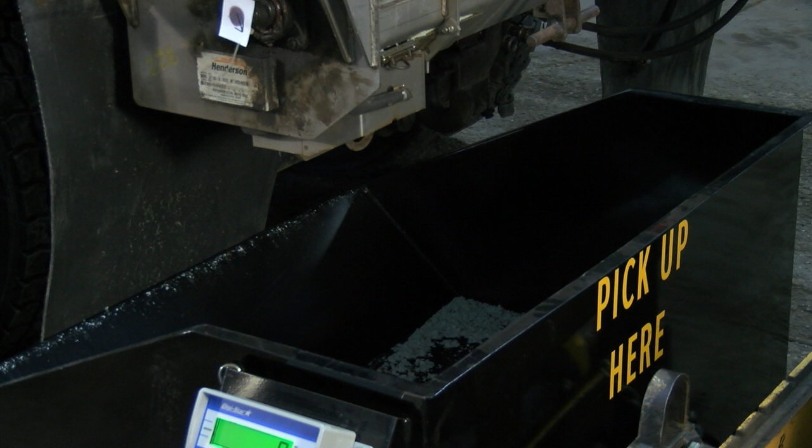Important items you're going to need to do this process thoroughly is a good scale. We went on a co-purchase with the City of Wixom, Michigan to purchase a scale, and it's really moved the process along a lot quicker and been very efficient for us. You don't have to have a big fancy scale to do this process. You can also just use a simple bucket with a human scale, set the bucket on a human scale, or you can hang this bucket from a fish scale or some type of hunting scale to do that.

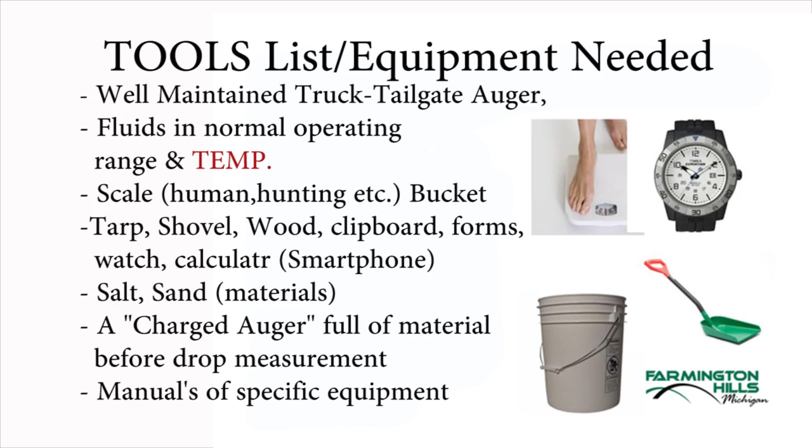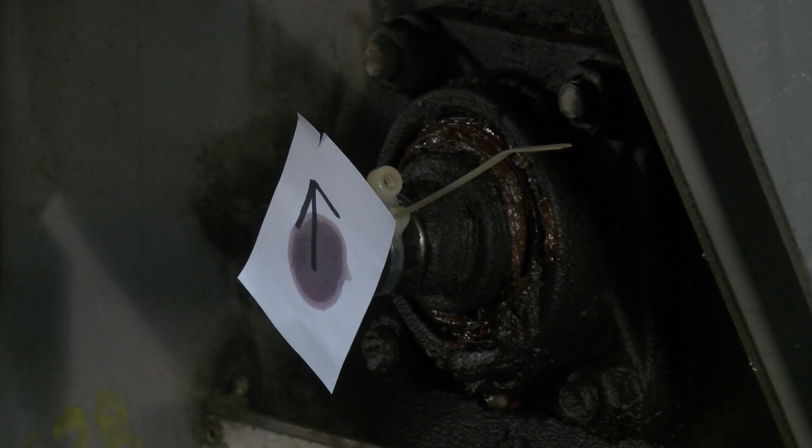It's also very important on the end of the auger shaft to either place a zip tie so you can count the revolutions once we start the process, or just a simple dab of grease on the back of a piece of white paper with an arrow on it so you can correctly count the revolutions that way.

The next important step in this process is have your coworker sit in the cab of the truck and have them make sure the truck is running between 1,500 and 2,000 RPM. That way they also have the stopwatch or device to time the 30-second or minute drop and count the revolutions of the auger. It's already in the truck with them, and you can stay in the back of the truck and count the revolutions.

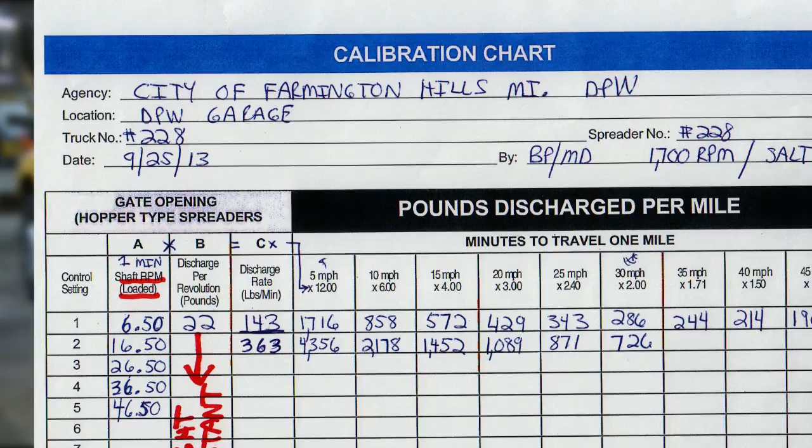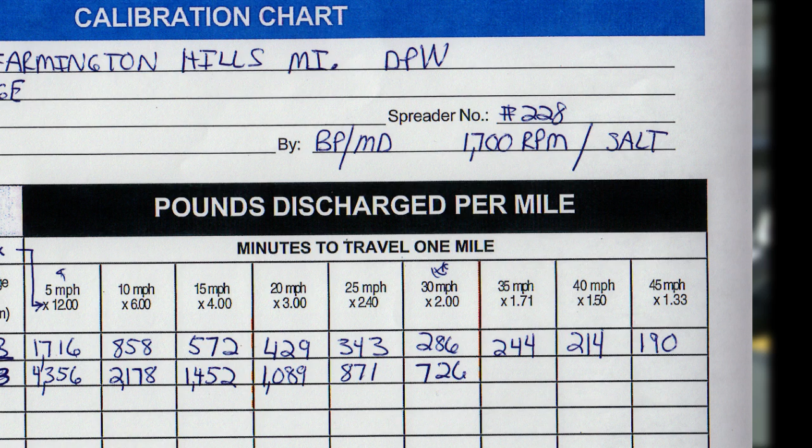Just a quick reminder, when you're calibrating each truck, make sure on each sheet that you write down the equipment number and the number of the auger in case you have a different auger or a couple different augers for the certain piece of equipment. Make sure your spinner circuit is on 0. We're only concerned about the auger circuit, so make sure your spinner circuit is on 0.

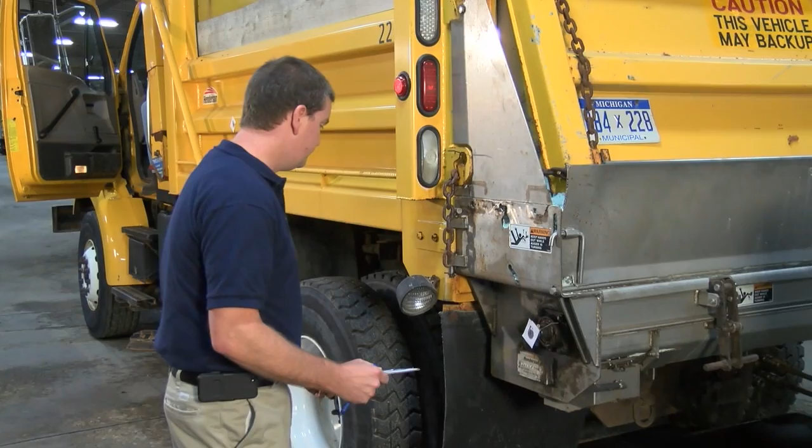Make sure the operator has the truck running, warm, and for this particular piece of equipment, we're going to run it at 1,700 RPM. Go ahead, Mike, start up the truck. When he says start, I'm going to count the revolutions until he says stop. Okay, Mike, I'm ready.

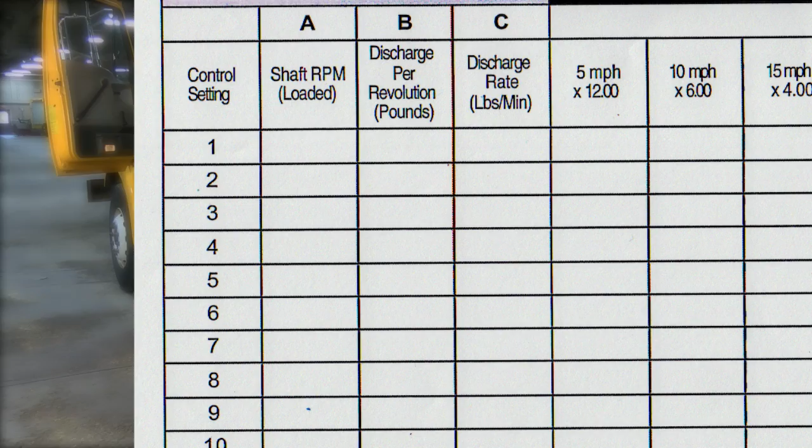We're going to go all the way up to auger 5 setting. This truck maxes out hydraulic capacity after 5, so even if we did all the way to 10 on the auger setting, the revolutions per minute after 5 would be the same. So we're going to go up to 5 for this next step. We're going to go 2, 3, 4, and 5.

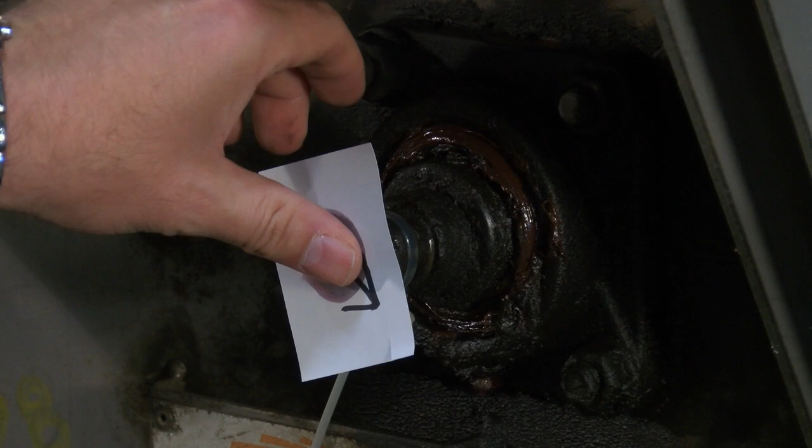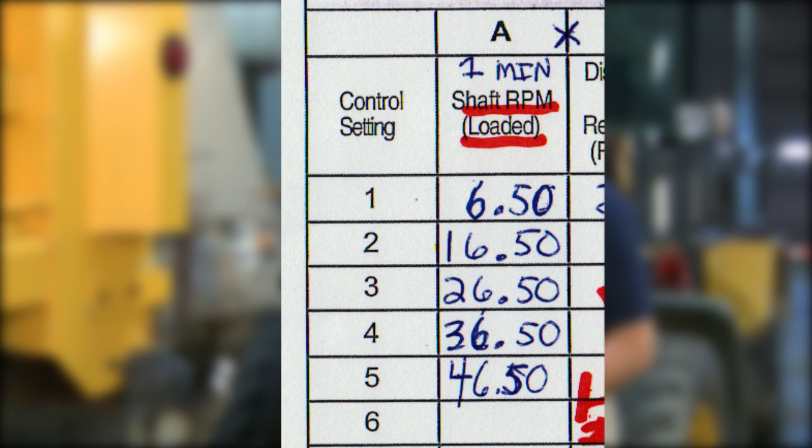So on this particular piece of equipment with a 9-inch auger at 1 minute, on auger setting 1 we got 6.5 revolutions, auger setting 2 we got 16.5, auger setting 3 we got 26.5. So you can see it goes up to a certain point, then once the hydraulics max out you should be getting the same number probably after 5, 6, 7 and so forth.

Okay, the next step in this process is called the drop test of the material. You want to make sure that the operator's got the truck running 1700 RPMs, fluids are warm. It doesn't really matter what setting the auger is, 1, 2, or 3. For our intents and purposes, we're going to do the drop test on 1 and count 1 revolution. Make sure your counter is zeroed out. I'm going to have Mike start the truck and I'm going to tell him to start and stop after 1 revolution.

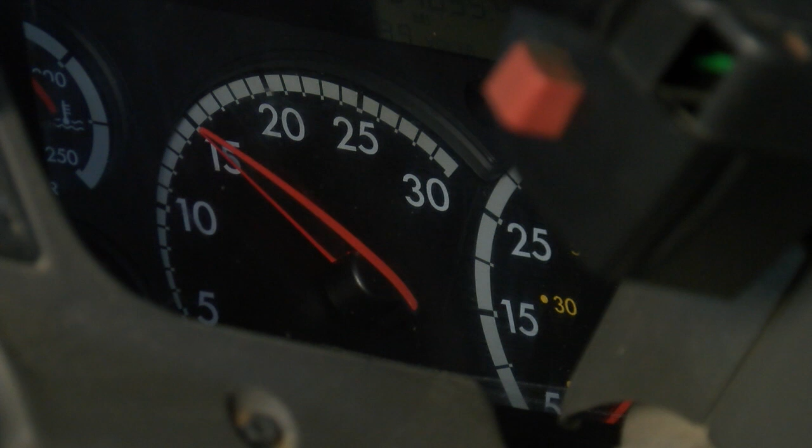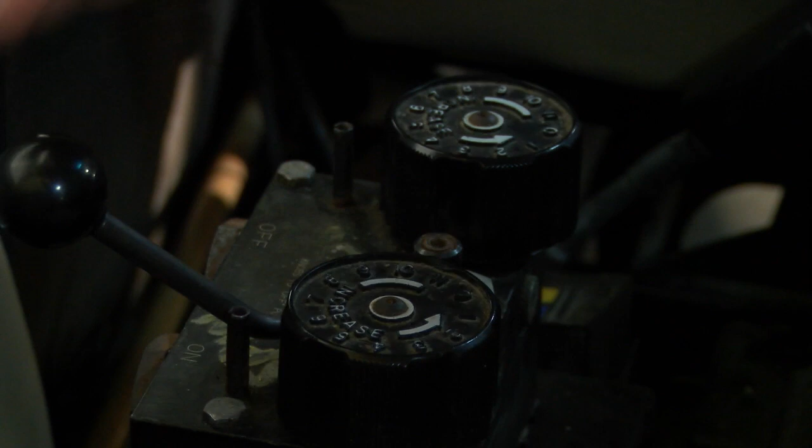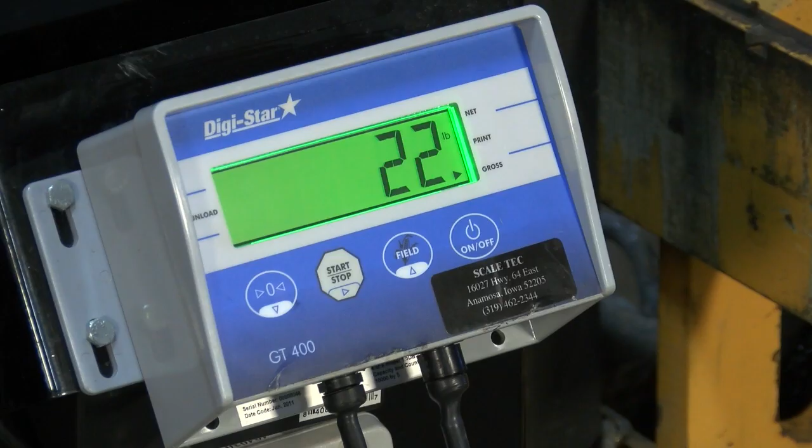Okay, Mike, go ahead. 1 revolution. Go. Stop. Okay, for 1 revolution of the auger, it was 22 pounds. You record that in column B on your chart, and that should be a constant number all the way down.

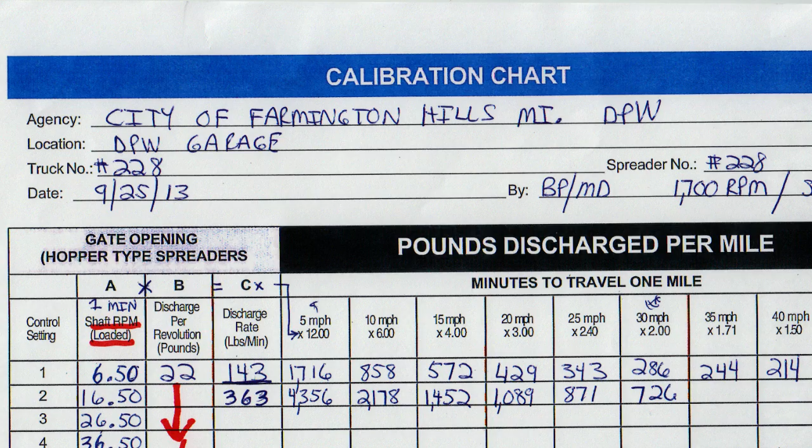Okay, we've got all the physical stuff done with the truck and the operation out in the garage. Now we're going to go over the calibration chart. I've already filled out the top portion of the chart. Like I mentioned earlier, you want to make sure you fill out a chart for each specific truck and auger. So I filled that out at the top. Now there's 3 columns, A, B, and C. A is the number of revolutions at 1 minute for each auger setting. So we did auger setting 1 through 5. I already wrote those down.

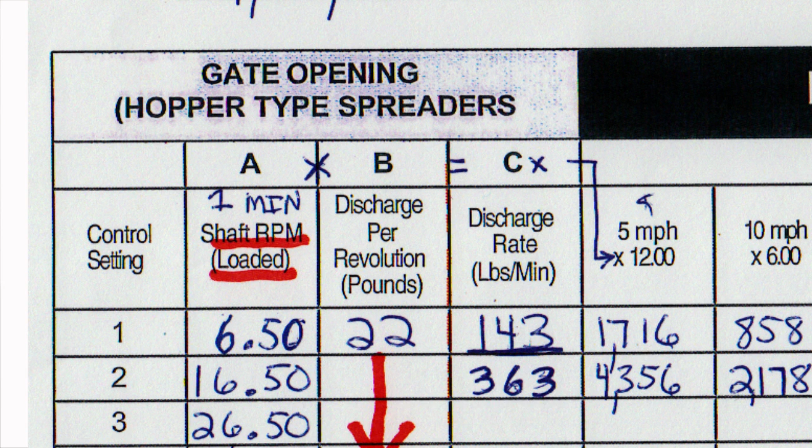Then we go to discharge per revolution in pounds. That was 1 revolution, that was 22 pounds. And that'll stay constant throughout this whole chart, whether it's setting 1 or setting 10. The next column is column C, and that's your discharge rate, pounds per minute. So basically you take column A times column B equals column C, correct? So for control setting 1, we had 6.5 revolutions in 1 minute. Times that times 22 for the discharge rate, and then equals column C, 143 pounds per minute.

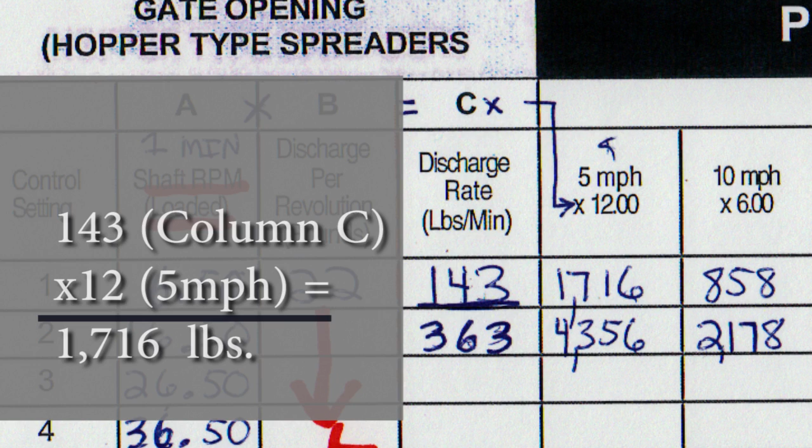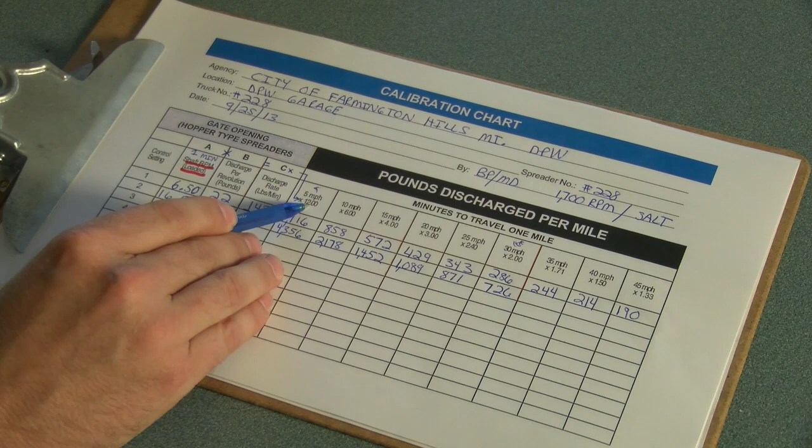Then we've got about 6 or 7 other columns, starts at 5 miles an hour, goes all the way to 45 miles an hour, and you have to take the discharge rate, pounds per minute, column C, and times that. For example, 5 miles an hour would be discharge rate, pounds per minute, times 12.00, and that'll give you your pounds per lane mile. So I'm going to have Mike double check some of my math. So column C's 143, discharge rate, pounds per minute, times 12.00 for 5 miles an hour, should be 1,716 pounds per lane mile. If you were in auger setting 1 at 5 miles an hour, that's how many pounds per lane mile you'd be putting down.

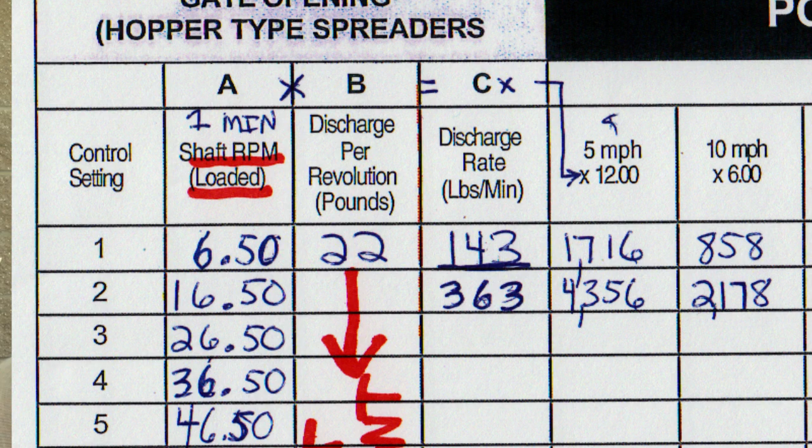And just for comparison, that was at 5 miles an hour for auger setting 1. If we took 143, discharge rate, pounds per minute, that's column C, times 2.00 at 30 miles an hour, that'll give us 286. So that would be 286 pounds per lane mile at auger setting 1 at 30 miles an hour.

We hope this short video has helped you in calibrating manual drop tailgate spreaders. There's a host of information out there on the internet. If you just Google Salt Institute of America, your local LTAP, American Public Works, etc. There's a bunch of winter committees and teams out there to help you as well.